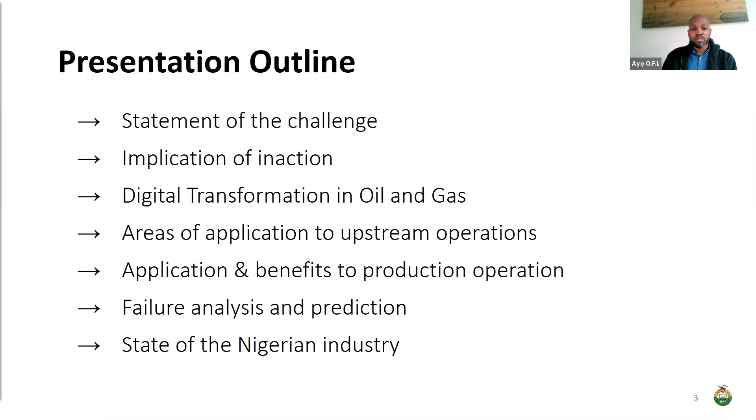So first of all, despite the diversification of fossil fuel consumption over the years, and all the energy transition initiatives that have been going on, we see that oil and gas is still playing a huge role.

So in recent times, in the West and in the Far East as well, you see a lot of subsidy for what's called renewable energy. So we're talking about hydrogen, we're talking about gas storage, we're talking about geothermal, hydropower, all that sort of stuff. And they are in direct competition with our oil and gas sector.

And then the other thing is the fact that you see here that we had an oil and gas crisis in 2008. I think the one before 2008 was probably in maybe 1991. Then we had one in 2016, and we're having one now. So there's beginning to be an increase in the frequency of these crises. What's going to happen next, nobody knows.

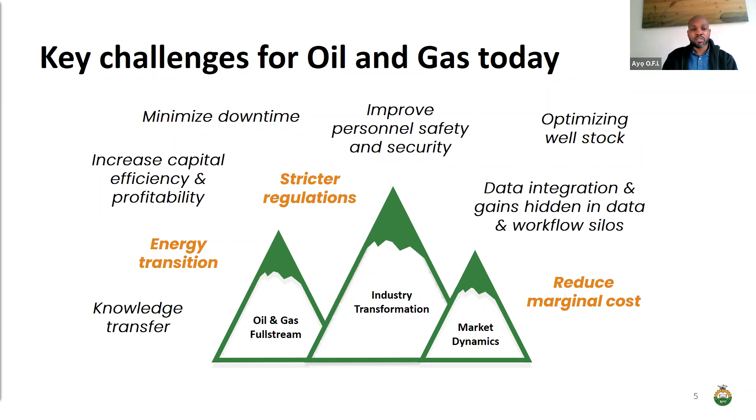But we've seen recently the American president has canceled the construction of several pipelines. In the EU, they're putting increased regulation around oil and gas exploration, and this is driving up the cost. So inspection and maintenance facilities that are required to run the business are increasing, and so this is sort of driving the business out of business, essentially.

Now, how does this relate to Nigeria? I will try to paint a concept. So there's a concept around life cycle assessment, and we're seeing it in the oil and gas service company, where operators, our customers, come to us and they want to know what is the carbon footprint of your operations, not only your operations, but of your equipment. So they're beginning to select equipment and operations based on carbon footprint and the impact on the environment.

And it's almost like going to a shop or going to a restaurant to have a meal. Now you start to see how many calories are in each of the meals, and people start to choose based on that. So we're seeing trends where people are more focused on the carbon footprint of the operations. And there's talk around how companies and countries in general will start to select their energy sources based on the environmental impact they have on the world.

So right now we know that diamonds, for example, are coded so that you know where a diamond is coming from. And if a diamond came from an area where regulation was not strict, then they wouldn't purchase that. So we can see things going in a way where customers of the Nigerian oil and gas business, because we don't use all our oil and gas, we export it, that's where we generate revenue from, might start to choose where they buy oil and gas from based on the environmental practices and the operations that are going on.

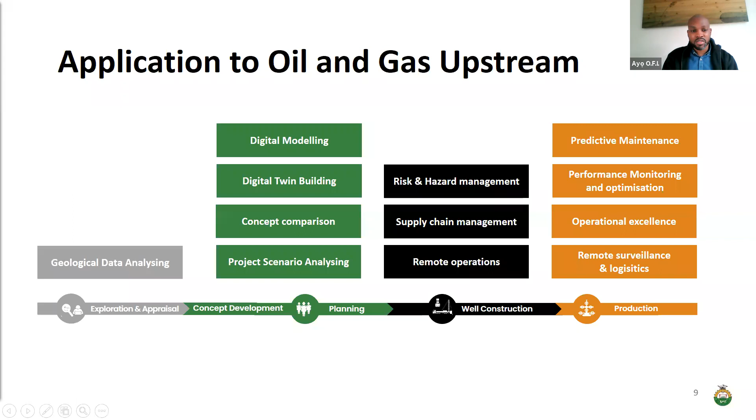With operational excellence, we're talking about how you can simplify your operations while ensuring that you have minimum disruption. Now, when I say disruption, I know I'm speaking about digital and AI and how disruptive it is. But when I say disruption to operations, I'm talking about downtime, non-productive time. And then how with remote surveillance, you can monitor your performance, so you have a single, visible view of the entire ecosystem.

So to production operations, as I promised, this is how we sort of operate in the industry at the moment. So different aspects of the company managing different databases in different formats, and everyone's really managing their own KPI. The drillers want to drill and complete a well, how quick they drill that well, and how easy, and whether they come out of hole. That's what they're managing. The facility manager wants to ensure the integrity of his facility, and the production manager wants to ensure that he's delivering the promises that he's made. But that is not an efficient way of working.

So what is being trialed in a lot of companies at the moment is applying Industry 4.0 to all these aspects to bring them together. So we continue to see companies connecting pieces of their operations, the little pieces that they have been sort of digitizing and analyzing on their own. They're now starting to manage all those in terms of cost, in terms of performance, in terms of damage or downtime, and the environmental emissions. So gas flaring, CO2, power usage, all that is beginning to be analyzed.

But what is being proposed is that you stitch all those little pieces together. So all the databases come together into one unified data image. And the whole application is based around collecting the data and ingesting and digesting large amounts of data. So in the industry, we have all these Internet of Things sensors and remote control drones that can gather data, surveil individual assets in real time.

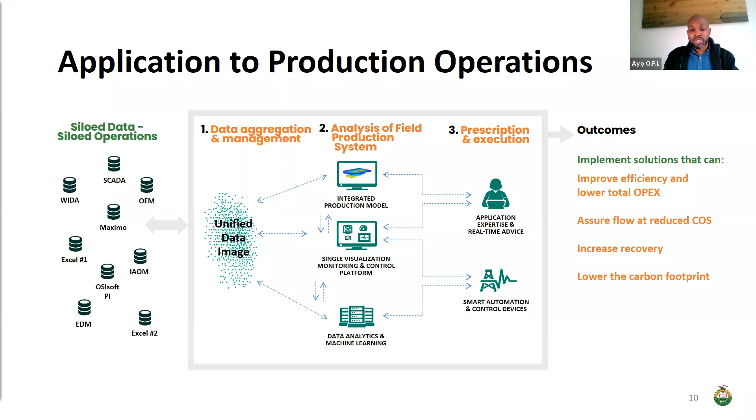So the topic is quite broad, and I'll focus on the reliability of one of our popular downhole rotating equipment, which is an ESP. So what is an ESP? An ESP, electrical submersible pump, is a series of multi-stage centrifugal pumps that are operating in a vertical position.

So what you have is the impellers and the rotor, and you are creating a head as these rotate. And what the head does is add pressure to the system. So it's a artificial lift system, and we employ it for many reasons - either because the reservoir pressure is too low, or the fluids that we're pumping are too heavy, or just to boost production because we want more production, or to reduce settling of solids.

And here's sort of like a typical performance chart for that. So here you have the head that you create, you have the efficiency, you have the power, and you come up with an operating window that you should operate the well within.

Now, this is design conditions, but what happens in the field is that the wells start to produce at a higher rate. Over time, the rates reduce, the fluid stream changes, you start producing more gas or more water or less oil, and you start to stray outside the operating window. But how do you know that if you're not monitoring the performance of the machine?

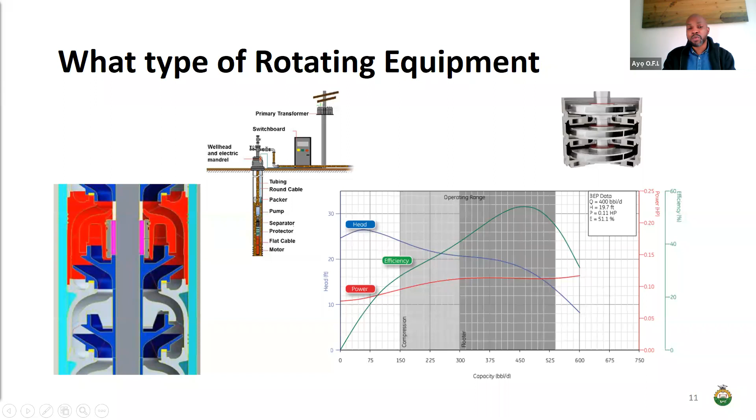Now, that same water, while it has one particular benefit of having a higher heat capacity and being able to dissipate the heat from the pump quicker, it also creates scaling and corrosion. So you start to have two problems that can affect the reliability of the pump. And every time these pumps go down, you have to wait a number of days to go in and fix the pump. So how can we apply AI to rotating equipment?

So we've had a lot of improvements in the past, focused around increasing productivity, production optimization, where we run the pumps by looking at the leading indicators for pump performance from that curve, and sort of modeling the pump to the nth degree, we can see that approaching this particular limit will cause failure.

Going below this will cause down thrust. So you stay in the sweet spot, and you ensure that even if you're not producing maximum production, you're producing optimal production over a period of time.

And then we started to move into, within the industry, decreasing costs, because again, it's driven by profitability and the stakeholders. So condition monitoring, which I've been talking about, preventive failure diagnostics, maintenance scheduling, inventory management.

A lot of these companies have to hold a number of these pumps in their yards just to ensure that they have pumps to swap out. Now that can be a huge cost if you're having to deal with that. And then managing the resources.

So again, it's an electrical submersible pump, so you're dealing with power consumption. Within Nigeria, within the Nigerian oil and gas industry, that power is typically generated at the well site or at the flow station, or on the upstream operations. Whereas in some other places, you might have to buy power from the grid.

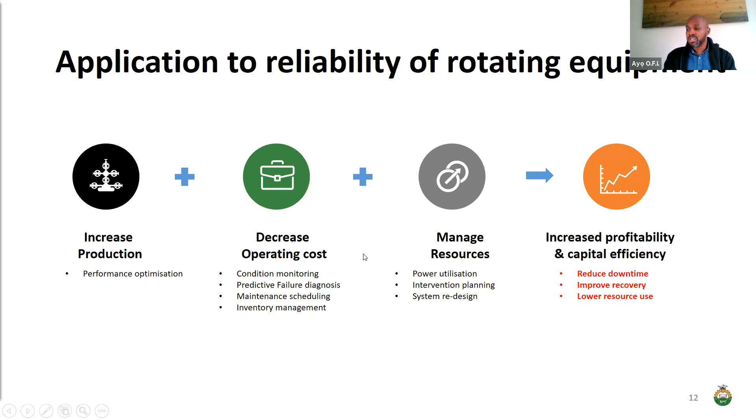So we need to constantly understand the failure mechanism for the pumps in particular, and how we can redesign the pumps to ensure that the run life of these pumps is increased. So all that's going to increase your profitability and your capital efficiency, in the same ways that I have been speaking about.

Now to go into some of the detail, it's been a bit difficult for me to present this part without actually using the tools that I need. But unfortunately, the tools that I need are proprietary to Baker Hughes, and some of them are third party, but purchased by my company. So I was unable to get permission to do that.

With data analytics, you can throw in all the data from 100, 200, in North America you're dealing with 1,000 pumps at once, and do failure probability. Now it starts to show you trends between types of pumps or when they were installed. If you're working with multiple vendors, it might show you the installation date, the models that were used, and then you start to group that.

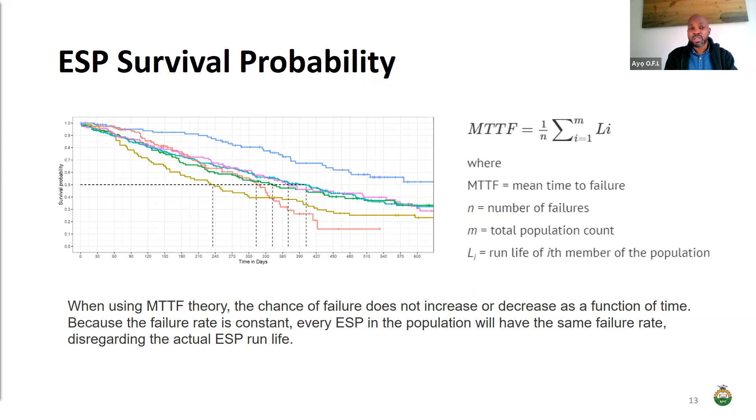But that is just the beginning of understanding the mean time to failure and how the different things around ESP run life affect it. You now need to match this data and these trends to other parameters to get the full picture of why your wells are failing earlier, or how you can improve the reliability of these pumps.

So you match it with data like equipment design, the type of pumps, the design limits, the conditions in which you're producing, chemical treatment, what sort of chemicals are you putting in, what sort of chemical programs do you have. Batch treatment, are you just pumping in corrosion inhibitors or scale treatments intermittently, or are you constantly dosing the fluid stream with it? What's the concentration that you're using? What's the dosage? Where are you injecting that?

All those are key parameters that you can throw into the mix to start to understand how much water are you producing, what type of fluids, have you done some analysis of the fluid chemistry to see whether it has tendencies for precipitate, tendencies for scaling, tendencies for whether it's got CO2 or H2S, which are corrosive at their individual partial pressures.

Then what sort of sensor technology do you have there? Because the sensor technology gives you the ability to monitor. So that starts to play a part in how much you know about your current operations.

And then how are you operating these wells? What's the installation procedure? Are you putting these wells on production right after installing? Who is doing the installation? What are the control mechanisms?

So with ESPs, typically you'd have a variable speed drive, which can change the frequency of the pump to manage the speed. In some cases you don't have a VSD, variable speed drive, so it's just an on and off switch.

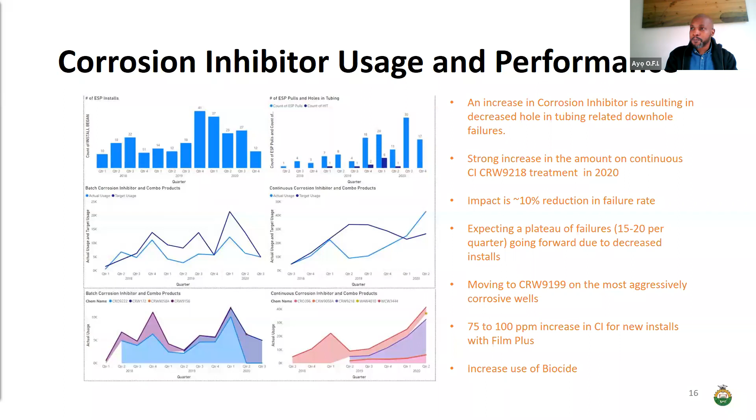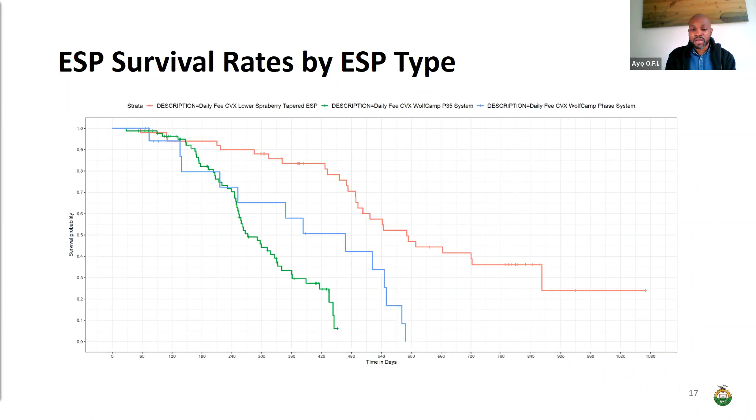Then we start to look at the ESP types for the wells that failed. Why are some wells failing? Why are some wells much better than the others? And you sort of start to add all the pieces of the puzzle together. Then the next thing you start to look at is failure mechanism based on either continuous monitoring and continuous treatment or batch treatment.

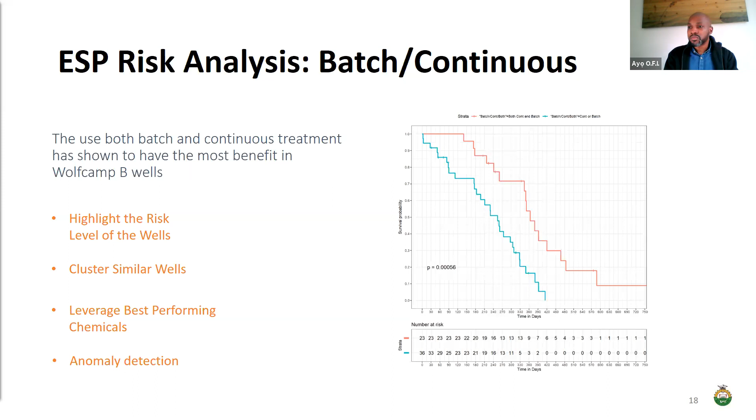Now, all this is done in software that has algorithms written to ensure that we can handle the amount of data that we can. We can filter out the outliers, and ensure that we're not dealing with the pumps that for some reason had a grounding issue. So in this analysis, we've taken out the issue of power failure. So it's only related to corrosion, because I'm talking about corrosion, chemical treatments, and its impact on the pump life.

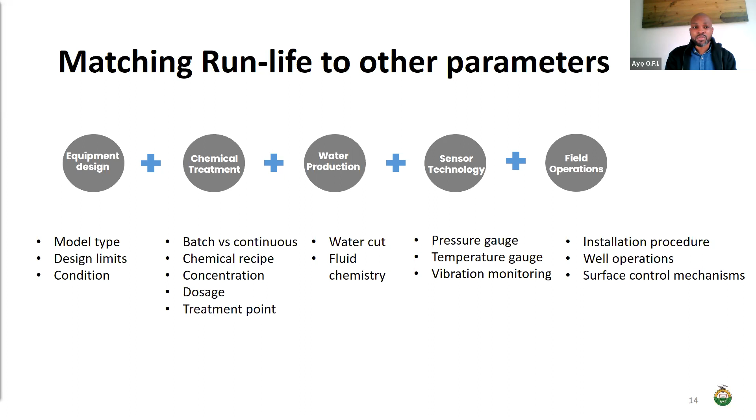So what are the key benefits for this? First of all, in production operations, we can start to enjoy system debottlenecking. So again, I speak about an integrated production model that looks at reliability of fixed assets. So when I say fixed assets, I'm talking about pipelines, flow lines, wellheads, separators, and then rotating equipment as well. We also start to look at utilization of resources.

So power, water in some cases when you're doing water injection for pressure maintenance or for reservoir flooding to mobilize the fluids towards a particular well. Everything comes at a cost. So the cost of burning that gas rather than selling it, the cost of purchasing power or the cost of generating power using the gas, the cost of sourcing the water and treating it, that has an implication. Then we start talking about consumables.

Now, one part I didn't mention in the previous analysis was we started to look at the optimal dosage. So the fluid chemistry will change over time. If you are able to carry out sampling, and we now have digital systems that can actually read off hard copy reports. So with certain customers, particularly in Central and Southern and East Africa, you have systems that are still quite analog. So people are still going out in the field and typing out an Excel. Now you need to digitalize all that, in such a way that your system can read off a report and incorporate that data into the system.

So where are we in the Nigerian industry? I've sort of pulled this out and tried to map out where I think we are. On the x-axis, you have the development path. This is sort of like a typical digital transformation journey. And on the principal y-axis, you have maturity, and then you have business value. So value increases going this way, and maturity as well.

So in Nigeria, we've already applied computerization. Connectivity is there. There's permanent downhole gauges with surface readouts to the office, via SCADA systems. That's all in place. So what can we do with that? We can collect the data. In some cases, we can see what's happening and we know what's happening.

But without a full understanding, without moving into this visibility, transparency, predictability, we're losing out on a lot that we can be doing. And with that, it relates back to what I was saying about the energy transition and how we view the oil and gas business going forward, where we would need to be a bit more responsible in the way we get hydrocarbons to our customers.

So we now need to start looking at how we can improve visibility, how everyone can be looking at the same data, everyone can see the big picture. And the question most of my customers ask me is, if it's so easy, why aren't we doing it? I say, because the key piece is managing the data.

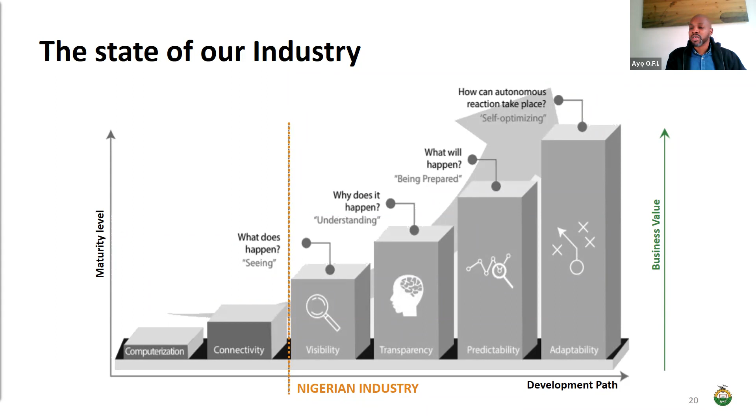And then we go into adaptability. So that's what I'm talking about, where you start to have these self-optimizing systems that can ensure that we protect the capital investment that we've had in the system, in the field. So how can we develop this for our industry? And I'm talking about in Nigeria in particular.

What sort of skill sets, what sort of frame of mind do we need to get our engineers? What do we need to start to teach our students in the university, those who are going to replace us in the industry, to do? It all comes around understanding what the problem is, building a solution, the perfect solution, and then operating or executing flawlessly with speed and with perfection.

So first thing we do, and this is just a work stream that we've developed to work with some of our customers, is we have a customer workshop where we frame the issue, get all the data together, where we understand what the customer's challenges are. In most cases, the challenges are usually symptoms. Oh, my wells are going down, that's not the challenge. The challenge is you're dealing with corrosion, but what they see is the symptoms.

And if the customer doesn't understand what the challenge is, then we sit down with the customer, we look at the data, we apply some very basic data science and start to probe further. And then once you agree on the KPIs and things that you want to resolve, because it's a journey, as I mentioned, it's a digital transformation journey. You can't go from computerization to adaptability straight away. You need to test things out, have a proof of concept project, make sure it works, go to the next level and go to the next level.

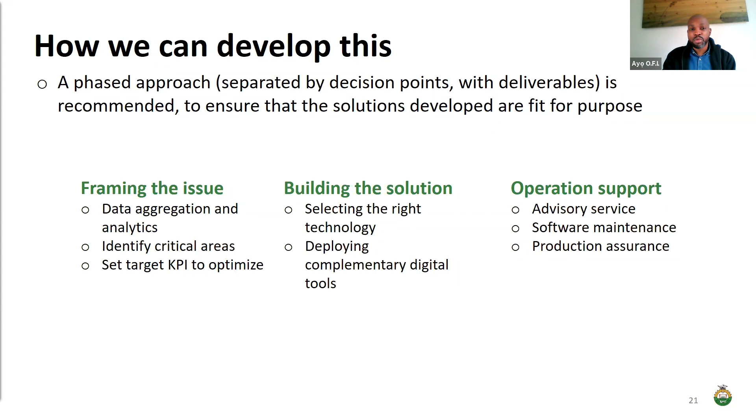And so it's typically like a gated process. At every point in time, a decision needs to be made, whether to proceed or not, whether to rationalize. Again, there's always opportunity costs. So our customers would always rationalize what they need to implement based on their priorities.

So that brings us to my last slide, and then we'll go into discussion. So just a brief recap. I've focused on implementation of ESP management today in the corrosion space, but practically all aspects of our oil and gas production operation system can have a similar work stream that's centered around the traditional oil field service technology with data science, data analytics, machine learning, and then the domain knowledge. Domain knowledge is in two parts: the subsurface domain knowledge and also the technology application knowledge.

So you need to have ESP experts, people that understand. The most obvious one is the ESP, because it's the one part of the well operations that is most likely to fail. It's one of two rotating pieces in the fluid stream. So how do we evaluate the risk? We analyze the large amount of data that's available. We develop trends between parameters. Those trends are verified by domain experts to understand whether those trends are real, or whether they're just artifacts within the system.